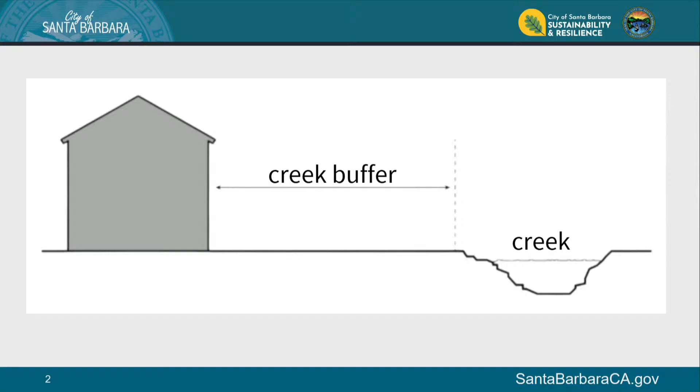So the reasons we have creek buffers are many, but here are some of them. One is to prevent new structures from being threatened by erosion and flooding. Also to limit bank hardening, which can degrade creek habitats but also lead to erosion and flooding downstream. They provide an area for runoff to be slowed before entering the creeks, thereby reducing flooding downstream and filtering pollutants. And they protect federal, state, and city protected sensitive creek habitats -- most riparian or creekside habitats are federally, state, and city protected. They also help mitigate cumulative impacts from development along creeks within the city.

We've had quite a few questions about why we actually need an ordinance as opposed to some other mechanism for creek buffers. Right now our only codified buffer -- meaning it's in the municipal code -- is a 25-foot setback from Mission Creek dating from the 1960s. All other city creeks lack defined buffers in our municipal code that apply to all development. So right now, when projects trigger CEQA, the California Environmental Quality Act review, a state law, protective buffers are determined on a case-by-case basis with technical reports. That process is costly and slow, and has resulted in inconsistent outcomes over time. Also, CEQA only applies when what's called a discretionary permit or discretionary action is required.

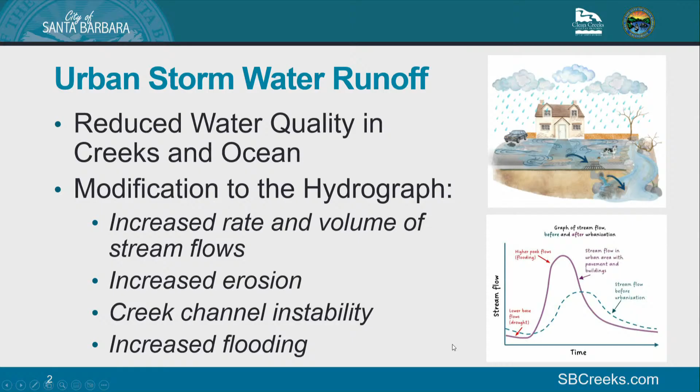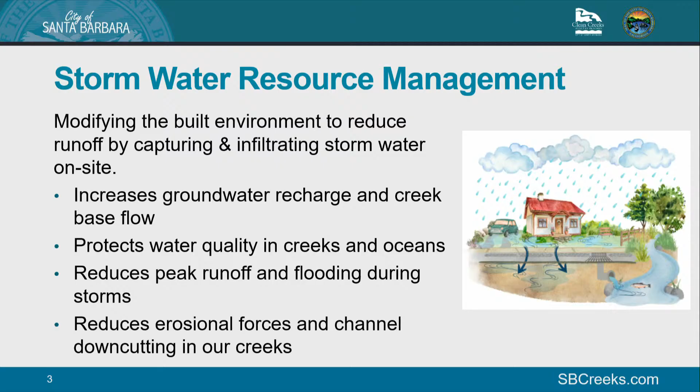So a lot of what we do is modify the built environment to reduce runoff by capturing and infiltrating stormwater on site. Doing this increases groundwater recharge and creek base flows between rainstorms, so you have more groundwater flowing to the creek, sustaining a more stable creek flow. It protects water quality by filtering pollutants, reduces peak runoff, and reduces the erosional forces that destroy riparian areas and cause downcutting in the creeks.

And that brings us to parkways. A parkway is that space between the street and private properties that is not the sidewalk - it's public property, in the right-of-way. Parkways often contain utilities, storm drains, water meters, sewer pipes, street trees, and signs, and they're crisscrossed by driveways.

They are most often maintained by the property owner behind each piece of right-of-way, so they're responsible for maintaining the vegetation. They vary in ground cover - often natural, sometimes landscaped, and very often there's hardscape on these parkways too.

These represent an opportunity to capture some of that rainwater and incidental urban flow coming off of the public right-of-way, off of the streets and sidewalks. Many cities in the country have programs that utilize these parkways - they've had them for decades.

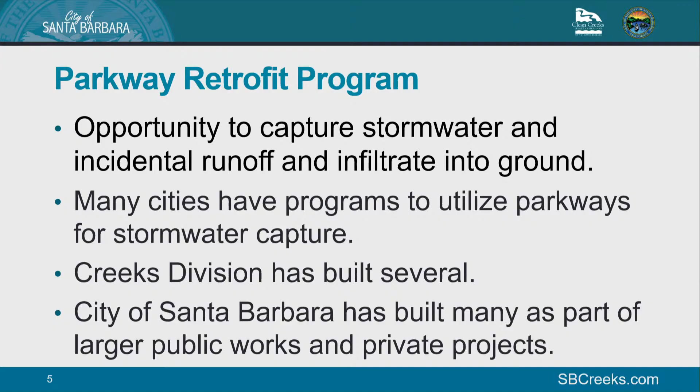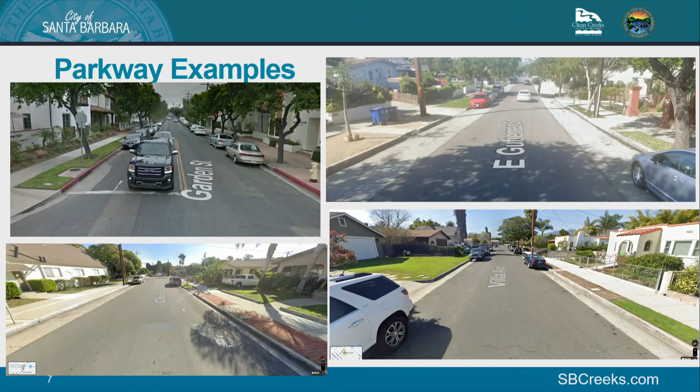The last picture on the bottom right shows a standard size small parkway on the right, and on the left there's actually city right-of-way. This occurs in a lot of areas in the city where it looks like private property, but it's actually public right-of-way, there just isn't a sidewalk there. Some neighborhoods have a lot of that, like parts of the Mesa and San Roque, and that's fine, but it's just an illustration of all the different public rights-of-way.

Looking citywide, we did an analysis of the impact this could have. There are roughly 27,000 parcels in the city, and a typical lot has about 50 feet of frontage at the sidewalk, with a standard sidewalk being 5 feet wide. So that's about 250 square feet per house on average. When you multiply that by 27,000, you end up with about 155 acres of sidewalk.

If we're able to capture that sidewalk runoff, preventing it from flowing directly to the street, which is a pretty simple thing to do, and allow it to go into the parkways instead, it's a pretty big impact. We wouldn't be able to find a 155 acre site otherwise, and the benefit is that this is all done in the place where it is. Maybe we might be able to do more.

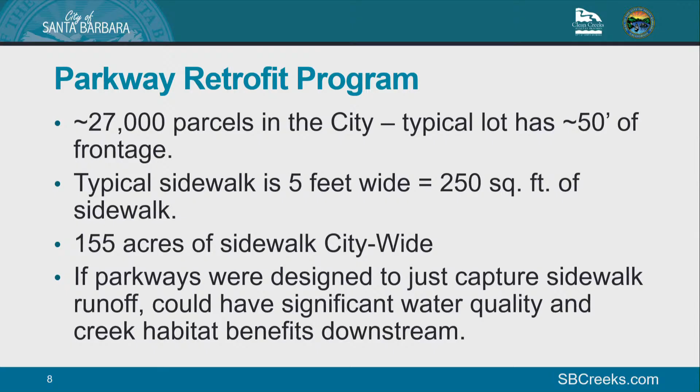We had a resident approach us who was very interested in putting in a parkway project that captured stormwater runoff from the street so she could use that water. She was interested in the water quality benefits. She came from Washington, D.C., which has a big program, so she knew a lot about this and wanted to do it at her property. This ended up being perfect timing for a pilot project at this site.

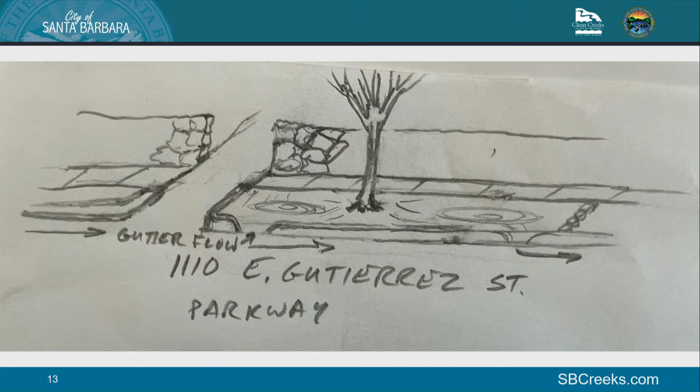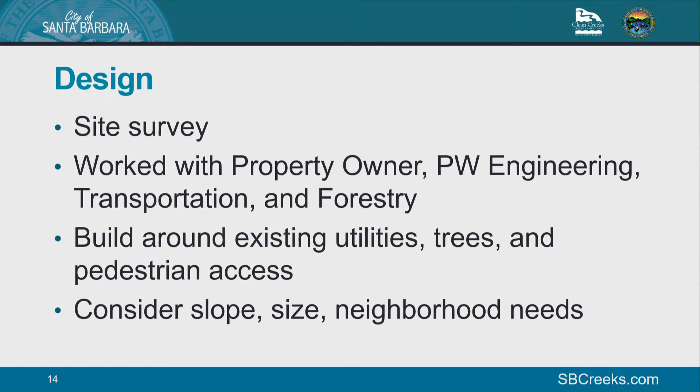After this, we did a survey and developed more specific plans. We worked with the property owner to develop this, along with Public Works Engineering, Transportation, and Forestry, who provided great input and design considerations, because there's a lot to consider. There's a lot of infrastructure, protecting the curb and gutter and the street, protecting the street trees, and also considering pedestrians and people getting in and out of their cars. So there's a lot of things that go into building around all that.

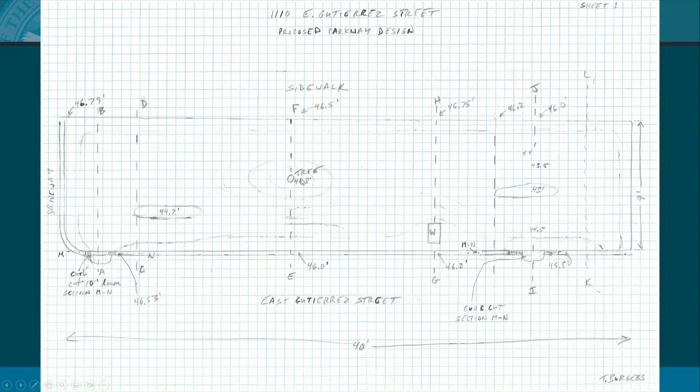These are a few cross sections, looking upstream, as if you cut that thing in half. On the right side is the sidewalk, on the left side is the curb and gutter. It's interesting how high the sidewalk is compared to the gutter—it's over a foot in difference.

That goes into how we design this. We want to leave a little ledge next to the sidewalk so that if a stroller wheel falls off, or your foot happens to walk off of it, you don't fall into a steep hole. We wanted to keep the slope as gentle as possible, but also meet the bottom end to where we can actually store a significant amount of water.

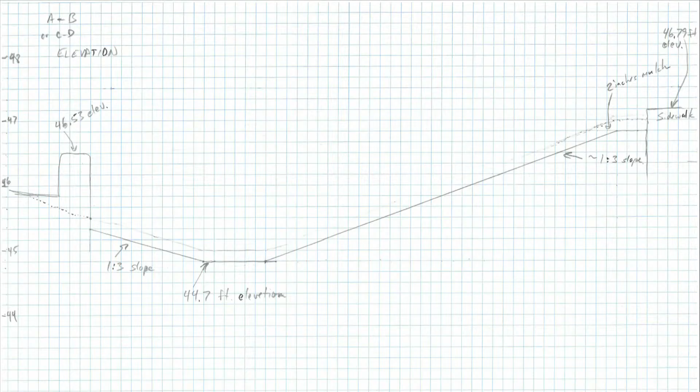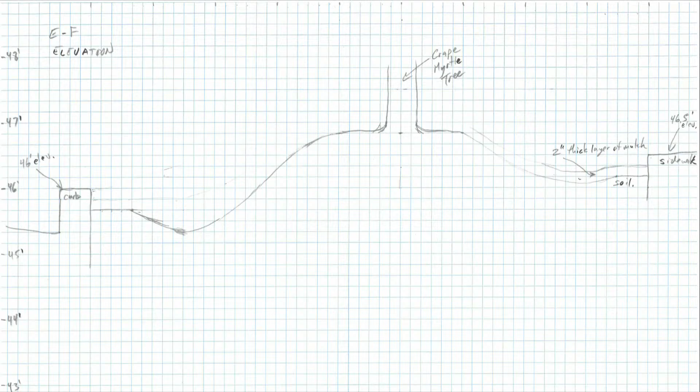This is the cross-section where the tree is, with root protection there. We will be putting a layer of mulch on top of the soil to protect that, and then you can go to the next slide.

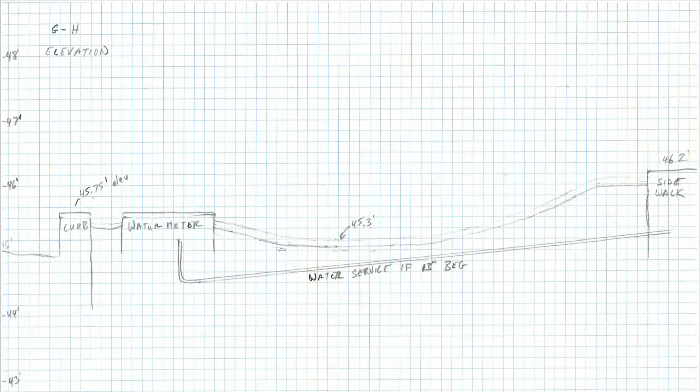The next view is where the water meter is. We want to be conservative on all of these—we don't want to break meters, and we want to make sure this works.

This is the second to last one, towards the end—the second curb cut at the bottom. You can see it's quite a bit of water storage potential. We're not going to be capturing all the water from all of Gutierrez Street, but if this was implemented at every house, we could capture a significant amount. That's the low-impact development approach.

This is sort of on the high end of what these projects would look like. The cost includes excavation, soil removal, cobble installation, hand finishing the grade, and the curb cuts. The cost is going to be $6,400. We got costs from several contractors.

We plan to install this in mid-July 2025. The contractor who's going to be working on it is Wilson Environmental. Interestingly, Daniel Wilson helped design Elmer Avenue, a big project in Los Angeles years ago that's well known for capturing street runoff.

The resident is interested in planting it, and we will monitor this for functionality and make sure the infrastructure isn't being affected by any water infiltrating. Then the resident will maintain the plantings.

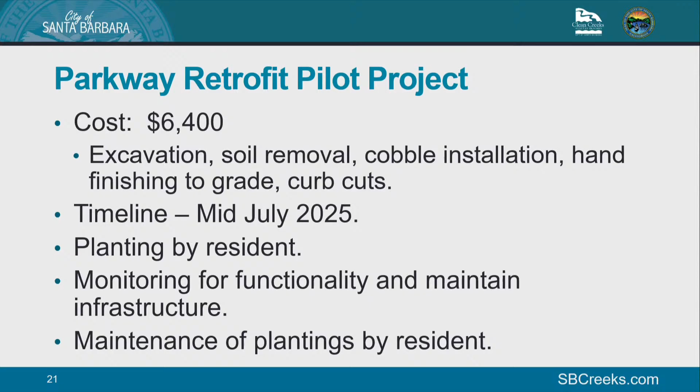Moving forward, we've done an initial citywide analysis and would like to reach out to property owners. We want to work with property owners who are interested in this, and hopefully our outreach garners some people contacting us. It's been piecemeal as it is, but hopefully we can get more and more opportunities, so we'll evaluate those opportunities and create designs.

Different designs, and maybe create some design templates. Every site is different, but we'd like to have some design templates that will streamline this process and make it relatively inexpensive to go in and do these.

This is a graphic output of one of the analyses we did. All the lines represent the right-of-way areas in the city.

We had a lot of inputs, but basically the color green represents lower slope—dark green is almost flat, and as it goes to yellow, orange, and red, it's really steep. The width is hard to see zooming out except for the really extreme areas, but it represents how wide the actual parkway is. So there are a lot of parkways available that are pretty wide and not heavily sloped.

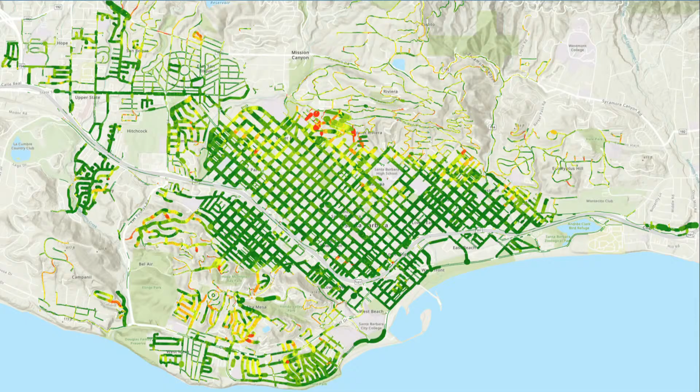We'll have a scale of different designs. The most basic design, capturing that 155 acres of impervious surface runoff, would be where we amend the soil in the parkway and grade it to accept that sidewalk runoff. A lot of times, even in parkways, the soil has been heavily compacted, so water just runs right off anyway, or it doesn't soak in very well.

The next step up would be where we have pavement and a property owner is interested in removing that. We've had a couple instances of that, where we'd remove the pavement from the parkway and then grade it to accept the sidewalk runoff.

The highest tier would be to accept that street runoff, and that's what we're doing in this pilot project, cutting curbs and grading it a lot lower to accept the runoff. That would be the most expensive, but the goal of this project is to implement this as widely as possible, keep costs down, and keep it as simple as possible to accept that passive runoff.

There may be other opportunities in public right-of-way spaces, like medians or other public spaces that aren't necessarily being used for other things, that we might be able to utilize for stormwater capture too.

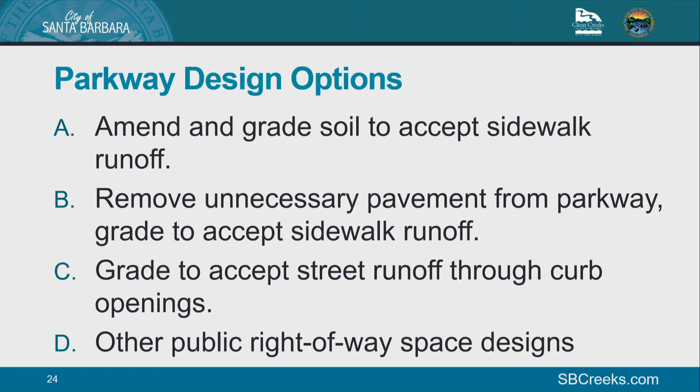The next step is our standard outreach protocol: newsletters, social media posts, city TV, and outreach events. Hopefully that garners some support. At the project we're doing right now, a couple of neighbors are interested too. As we develop these, maybe we'll have some signage or a little explanation of what it is, and inevitably people see that and become interested in implementing it.

So that concludes the presentation. I'll take any questions if you have any.

Thank you. Thanks so much, Tim. This is very exciting. I've long been a big fan of curb cutouts and the potential for increasing stormwater runoff capture and infiltration. But first, this is an item for discussion, so we'll go first to questions from the committee, and then we do have one public comment, and then we'll come back to the committee for discussion.